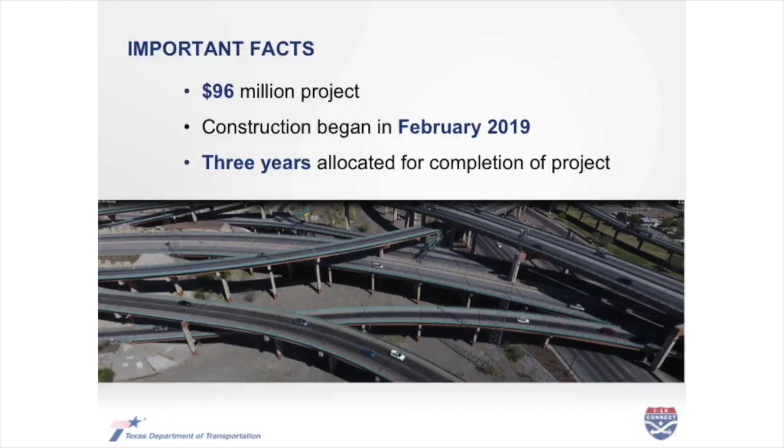Recognizing that this project is right in the middle of the city at the intersection of more than two very highly traveled roadways, the Texas Department of Transportation created a contract structure that allows for some incentives to get this project done more quickly. And I think we can all agree the faster this project is done and the roads are clear, the better.

All right, we're going to take a look now at an illustration taken from high above the spaghetti bowl. What you should see on your screen now is an I-10 Connect project overview photo showing several blue ramps off to the right side of your screen. So right now we're flying high above the spaghetti bowl, looking to the south, with Border Highway, the Bridge of the Americas, and the El Paso Zoo at the top of the screen.

Everything you see there in blue is a new ramp, either brand new construction or a ramp that will replace an existing ramp. And the biggest, most impactful change as a result of this project is when and where you make the decision as to whether or not you're going to Ciudad Juarez or if you're just going to stay in El Paso and get down to Border Highway.

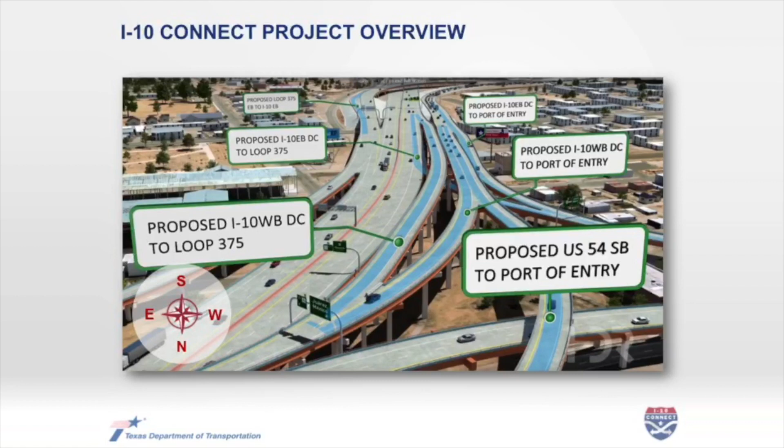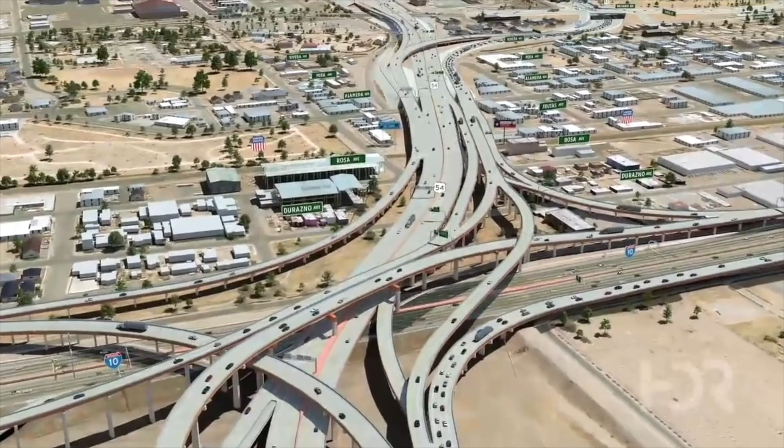What we're going to do now is switch over to a video that flies through the project site and shows several driver's eye views as well as overhead animations of the project as it will look when it is completed. I believe the video is presently playing, so we should be good to go.

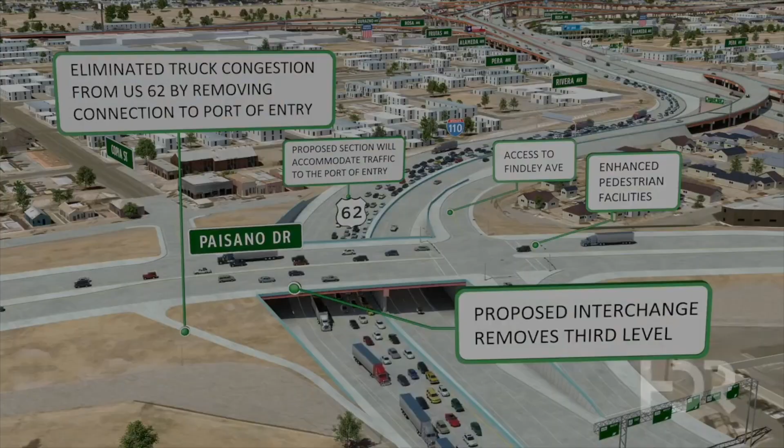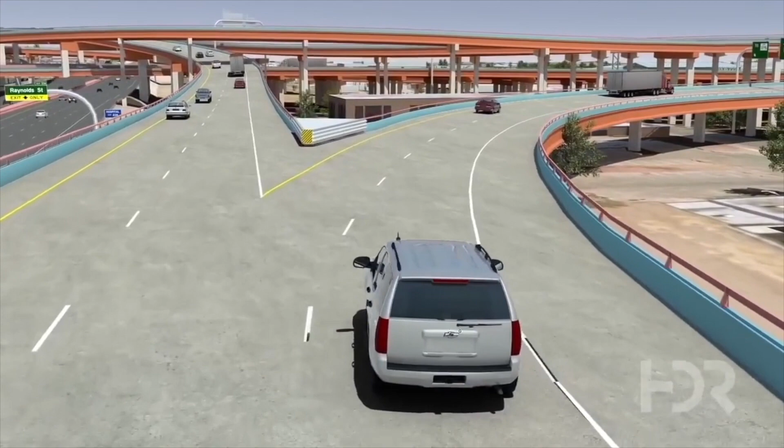As you take a look at these driver's eye views, they were really devised with the idea of where you might be going. So this is a view showing if you're coming from downtown El Paso, heading southbound towards Loop 375, trying to get down to Loop 375 to use it as an alternate to I-10.

This next driver's eye view is for someone coming from the east side trying to get down to the Bridge of the Americas, a view a lot of us have seen many times, taking that exit ramp high above the Spaghetti Bowl. One of the things you'll see in this animation is the different decision point, that sooner decision point as to whether we're going to stay in the US and get down to Loop 375, or head off to the right and down to the Bridge of the Americas.

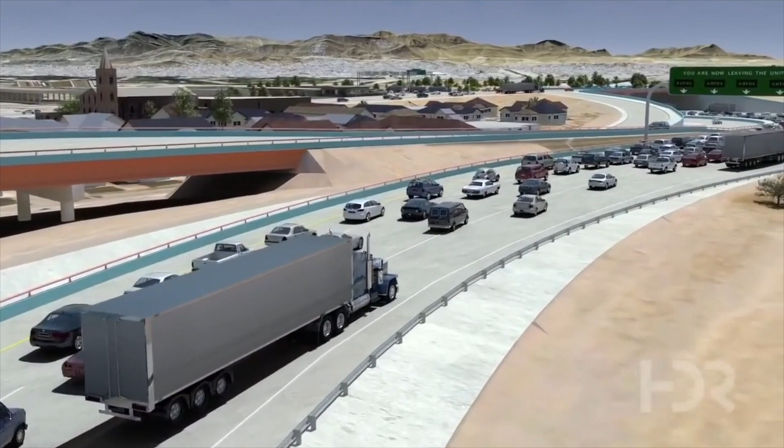We want to take a minute to show you some of what is actually going on out there in the field. That animation very much reflects what the project will eventually look like when completed, but there's a lot of incremental work that's been going on.

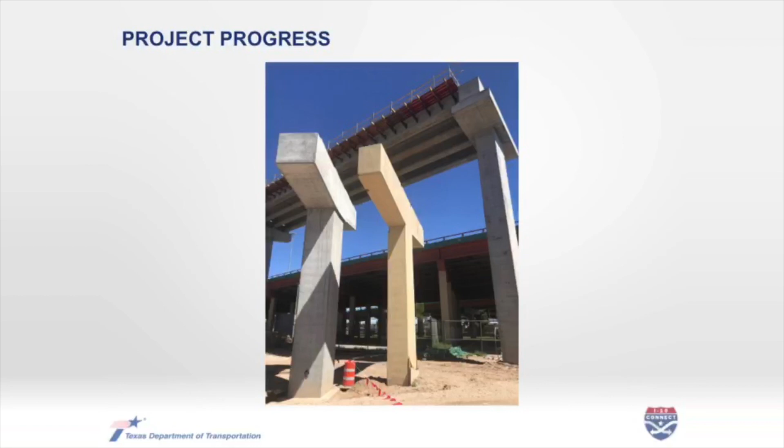The photos you're seeing right now are of several of the columns that will hold up many of those new direct connector ramps in the Lincoln Center area. We'll move on to the next slide.

Now you see a slightly different perspective, but again, looking at some of those new columns to support new ramps that will be built as part of the I-10 Connect project. Ramps, bridges, direct connectors are really the focus of this project, making sure that if you're going from I-10 to Loop 375, or Loop 375 to I-10 at the Spaghetti Bowl, you have a much easier time than you do right now.

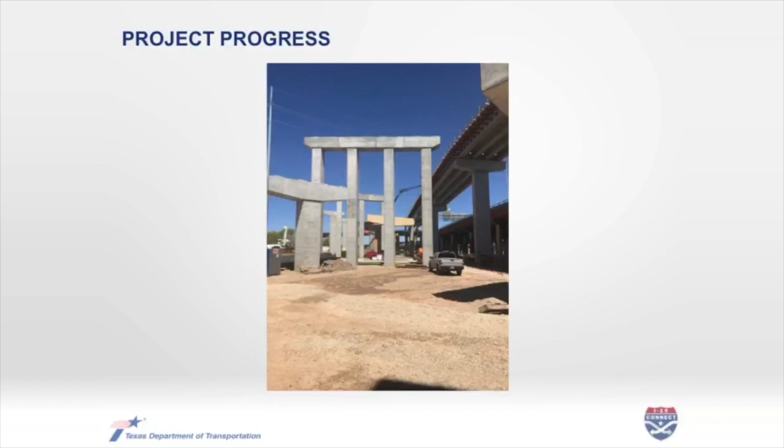So that shows some of the progress in terms of concrete and steel, but let's take a look at some of the traffic control changes which have been implemented throughout the project to help crews continue their work. One of the biggest recent areas of traffic control change is right at the intersection of I-110, the short freeway spur that leads to the Bridge of the Americas, Paisano, and US 54.

So in that area between, say, the Zoo and the Chamizal on Paisano, a lot of changes are underway. One of them: a small neighborhood street, Latta, closed to all traffic at Paisano Drive for the installation of concrete paving. The actual location of the travel lanes on Paisano has also been relocated temporarily in that area.

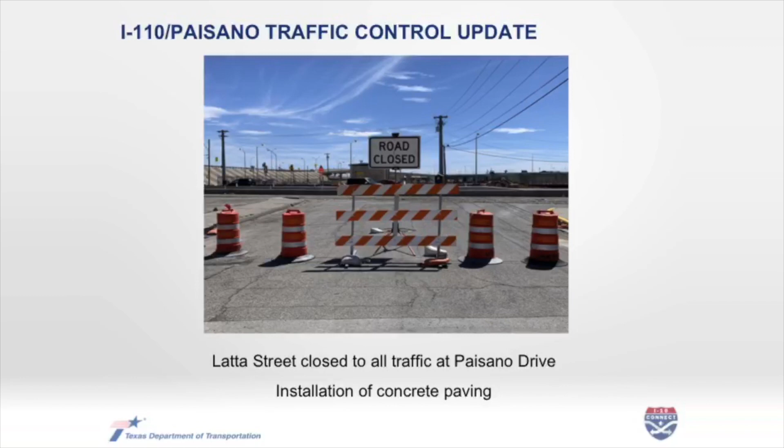Another really important change for folks who live in the Findlay Latta neighborhood, right across from the Bridge of the Americas, is the temporary conversion of Gateway South into a two-way street. We just showed you that Latta Street, one of their main ways in and out of the neighborhood, is closed. So to alleviate some of the pressure, Gateway South was temporarily converted to a two-way street to allow folks living in that neighborhood to go in and out.

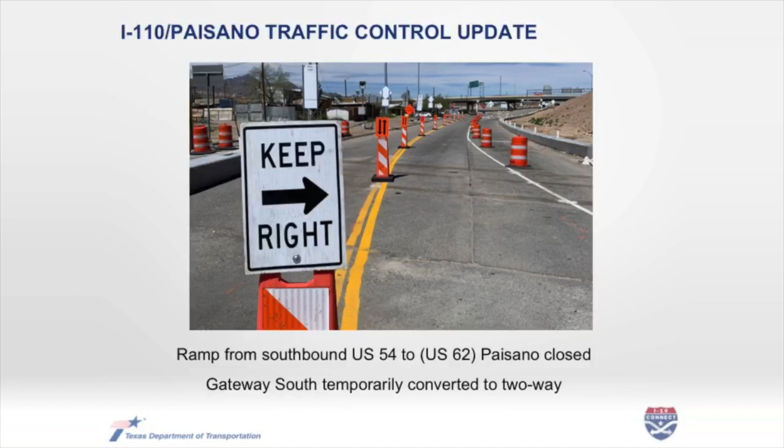As part of that change, at the upper right side of the photo, that ramp which usually leads from southbound US 54 to Paisano is closed. Of course, you don't want traffic coming off of US 54 right into two-way traffic on the gateway in that temporary configuration, but that's to make sure folks who live in that neighborhood can get in and out.

Another temporary change: you see a temporary left turn access, CBP access only, right across from St. Francis Xavier Church, a temporary left turn there off of Paisano.

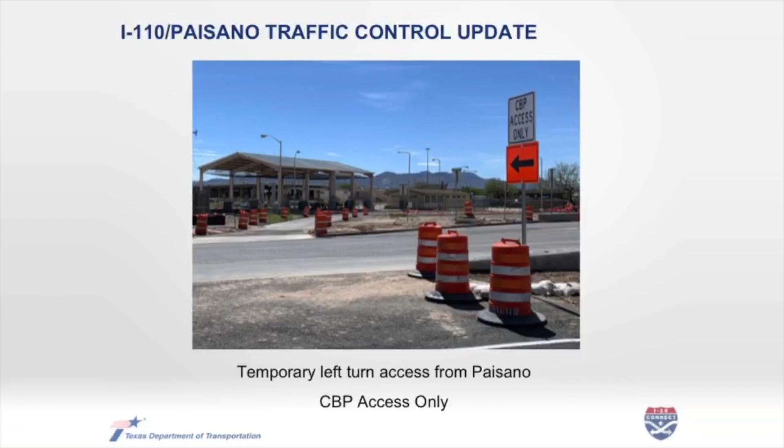One of the other things taking place long-term in that area, just to get your bearings, I-110 shown here in red, is that short freeway spur leading to and from the Bridge of the Americas. I-110 is closed to all northbound traffic under Paisano as it leaves the Bridge of the Americas.

So right now, if you are coming out of the Bridge of the Americas, we recognize there is a lot of traffic heading north and south, very much diminished now because of an agreement between the United States and Mexico to limit travel to essential traffic only. But any traffic coming north out of the Bridge of the Americas has to take that turn and ideally take Paisano over to Gateway North and enter I-10 and US 54 from Gateway North. Now, I-110 heading south towards the bridge, from El Paso into Juarez, is still open but remains reduced to a single southbound lane.

Let's go ahead and take a look at the next slide, and I want to show you some temporary signage which has gone up in that area.

It's very similar to signage you've seen permanently, but we want to talk about why this signage was placed temporarily, and where it was placed. That last minute detour or U-turn that you could usually take when you get down to the Bridge of the Americas to stay in El Paso isn't available.

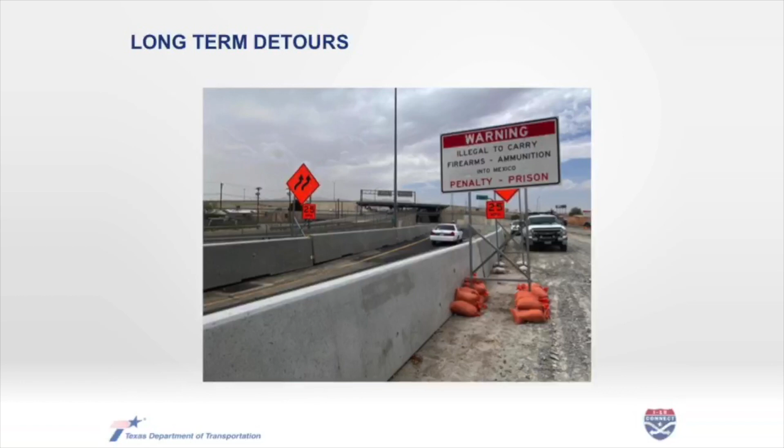So that's a lot of changes in place in that one tight little area around the Paisano I-110 US 54 interchange. We have a video that's going to break it all down for you in animation, just to show you all of these changes again. So we're going to let that video play right now.

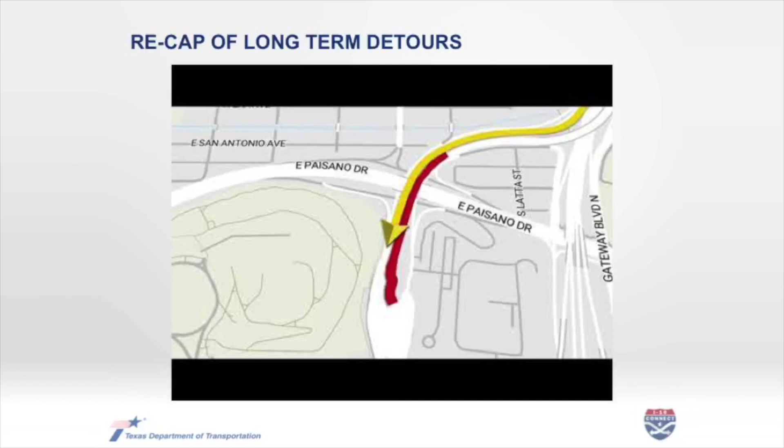Again, all those changes on I-110, the detour heading south, the detour heading north, the lane changes on Paisano, are long-term, in place until further notice. We have some short-term changes we want to make sure you're aware of as well, including an upcoming closure that's been in place on weekdays and will continue weekdays next week.

The ramp which connects eastbound Loop 375 to US 54 will be closed to all traffic. If you're out and about, the way you will detour around that is to take the US 62 Paisano Coles exit off of Loop 375 just east of downtown, make your way past the Chamizal on Paisano, and then turn onto Gateway North, where you're able to access I-10 in both directions and US 54.

Another important closure coming up tonight and Wednesday night is on Alameda Avenue, right under US 54. If you're heading eastbound on Alameda, say towards UMC, you'll detour onto Copia, Gateway East, and Reynolds. If you're heading away from UMC, you would just stay on Paisano to Copia and then get back on Alameda.

Worth sharing, we're recognizing this may be a time when emergency medical services are especially needed. We've been extra diligent to make sure we're communicating directly to EMS and leaders at University Medical Center to make sure they're aware of all of these changes.

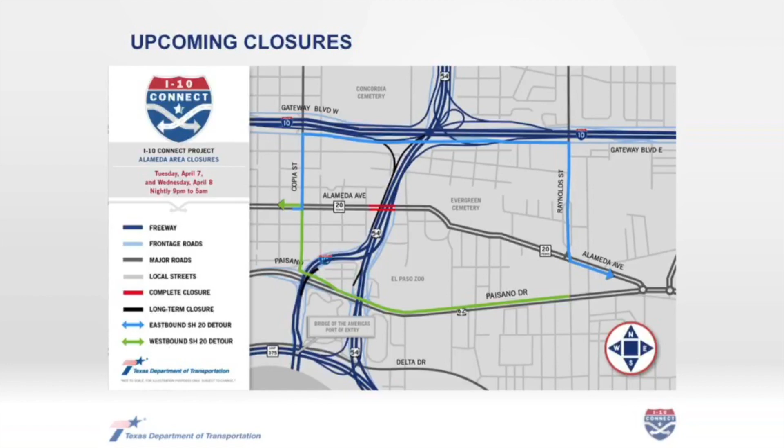So those are all the changes that are in place right now or coming up in the near term. But we're just going to begin to lay the foundation of understanding for phase 6, which is coming up at the end of the project. Still several months away, but it's going to be very impactful.

Just to make sure you're aware, we will move into a phase where there will be complete closures of eastbound and westbound Paisano over I-110. One of the things you saw in that earlier animation was the fact that the Paisano interchange there just north of the Bridge of the Americas goes from 3 levels to 2. To achieve that, all of that highest level, the bridge over the interchange, has to be completely demolished. And in order to do that, traffic has to be closed east and west on Paisano at I-110.

As is already in place, northbound traffic on I-110 will be able to go up and make that right onto Paisano and then access US 54 and I-10 from Gateway North. Southbound I-110 heading into Juarez will remain in its temporary configuration at most times. Occasionally, there will be moments during phase 6, coming up towards the end of the project, where southbound traffic heading to Juarez will be detoured onto Paisano Drive.

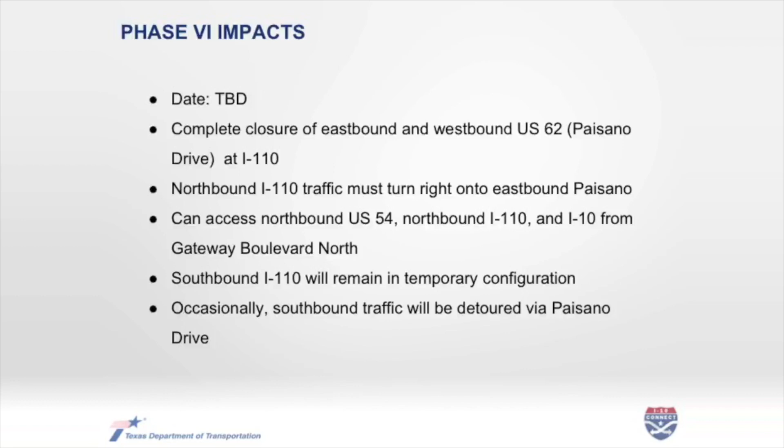None of those changes, other than the ones already in place, will be going into effect in the immediate future, but I want to remind everybody that there are still many months to go in this project, and some very high impact closures as well.

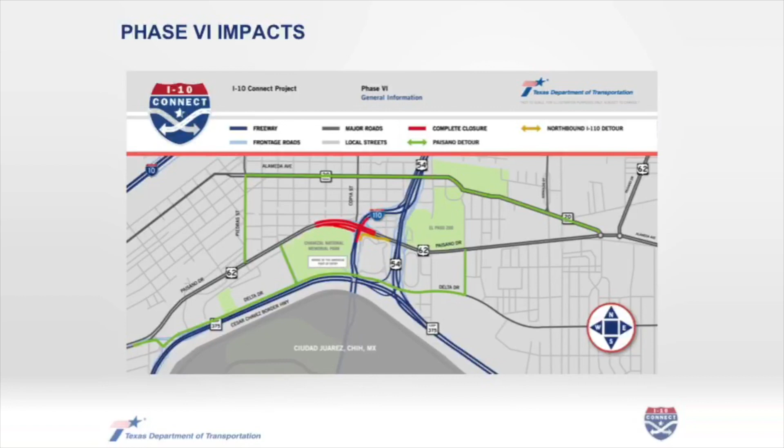So we have a map to show that. That area you see in red is focused just north of the Bridge of the Americas, showing I-110 closed to northbound traffic and Paisano closed to east and westbound traffic. That Paisano traffic will be detoured up onto Alameda or onto Delta Drive as an alternate.